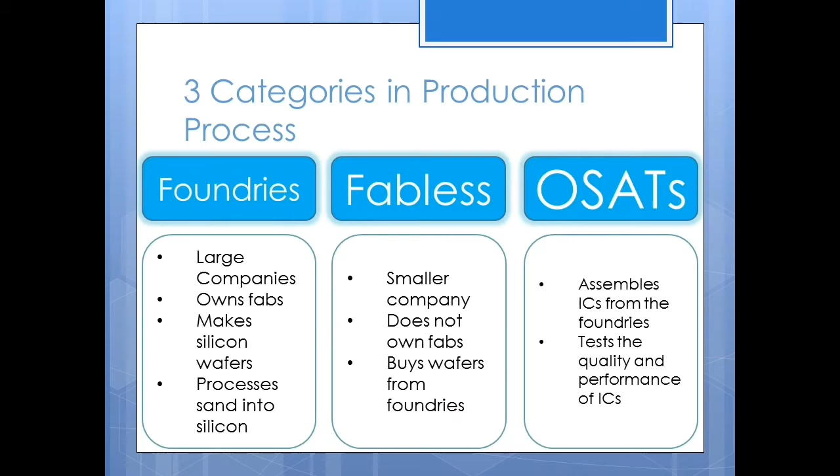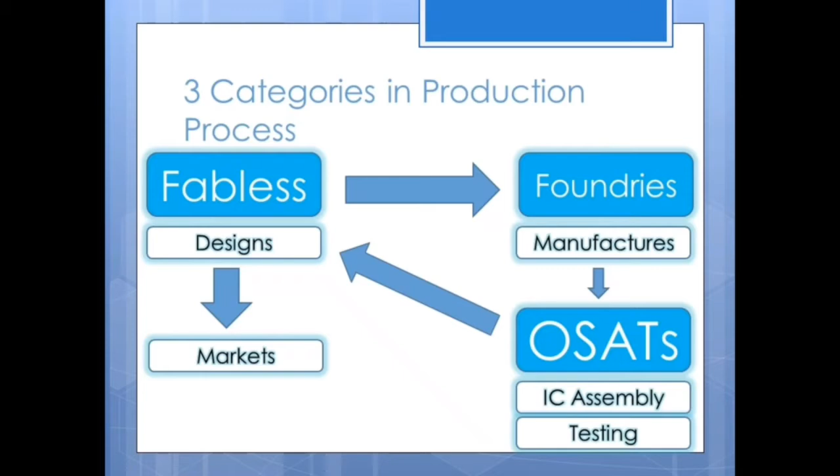There are three categories of players in the production process: the foundries, the fabless, and the OSATs, which stand for outsourced assembly and test companies. These three companies work with each other to produce the ICs that we use. The fabless designs the circuits which the foundries manufacture, to be assembled and tested by the OSATs, then marketed by the fabless. There are also companies called IDMs, which solely manufacture, design, and package their own ICs.

In terms of packaging, single die packaging has only a single die with a single function in each package. The SoC is like a complete system on its own. The MCM is composed of multiple interconnected chips with multiple functions. SIPs are like MCMs that are stacked, therefore smaller in size. SOPs are like SoC and SIP, but their passive components are embedded in the substrate, which makes them more compact.

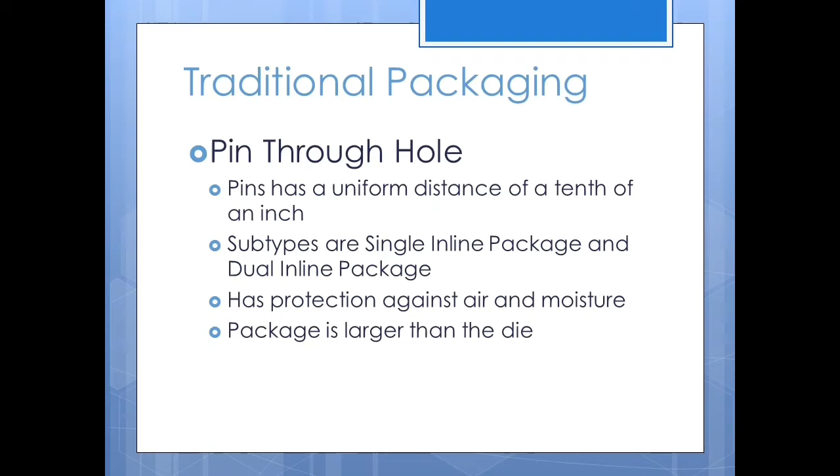Packaging technology can be classified into three types. Traditional packaging has two methods: the pin-through hole, where pins are inserted through the hole and then soldered. An example of this is the Atmega 328P in the original Arduino Uno board.

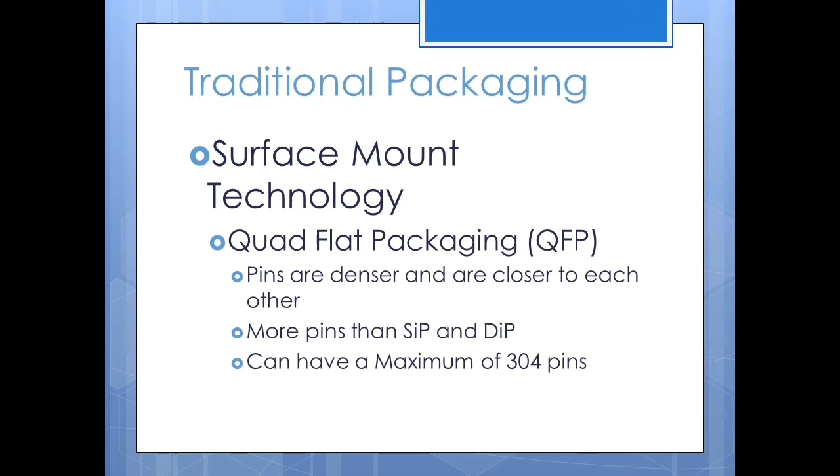Another method is surface mount technology, where the components are soldered only at the top of the board. An example of this is the Mega 328P, which can be seen in my generic Uno board that uses QFP.

Another subtype is the PGA, where the pins are found on the surface of the chips. PGA can be seen in AMD's Ryzen CPUs. Since the pins are found on the surface of the chip, it is more fragile.

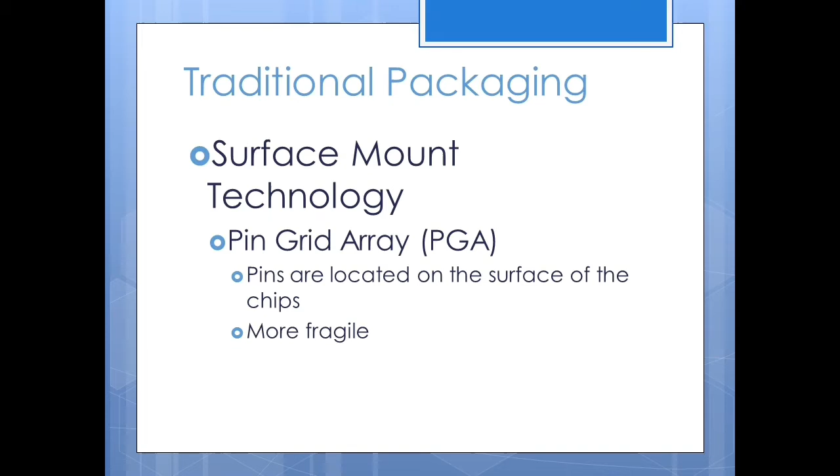Another type is the ball grid array, which uses solder balls rather than pins for easier soldering. In this type, the chip would be attached permanently. There is also a micro FCBGA, where the die is facing downwards.

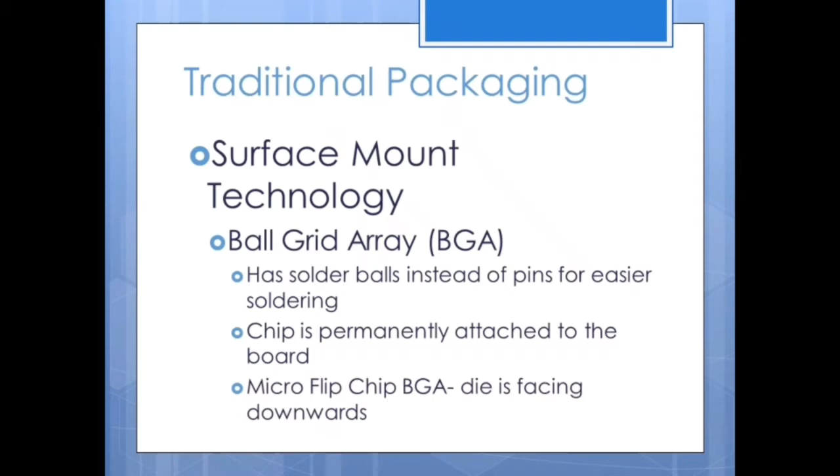Before going to the 2.5D and 3D technology, let's first talk about the silicon interposer. The interposer is a way of interconnecting IC components without the use of wires. They make use of TSV technology, which we will discuss later. It has higher density interconnection and excellent thermal and electrical performance. It is used for low power applications.

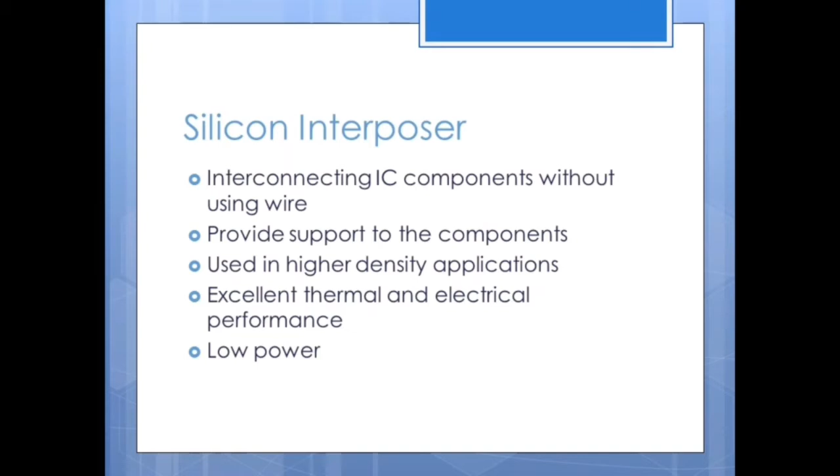There are two types of interposers: the passive interposer, where the substrate only contains passive components, and the active interposer, which has active components in the substrate.

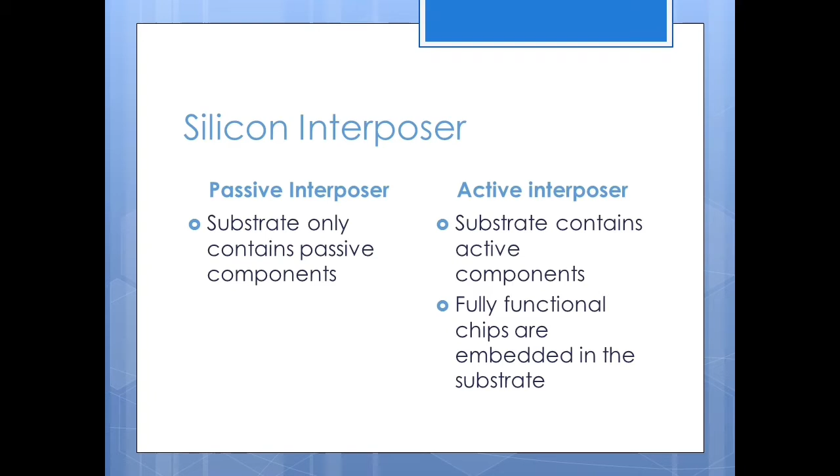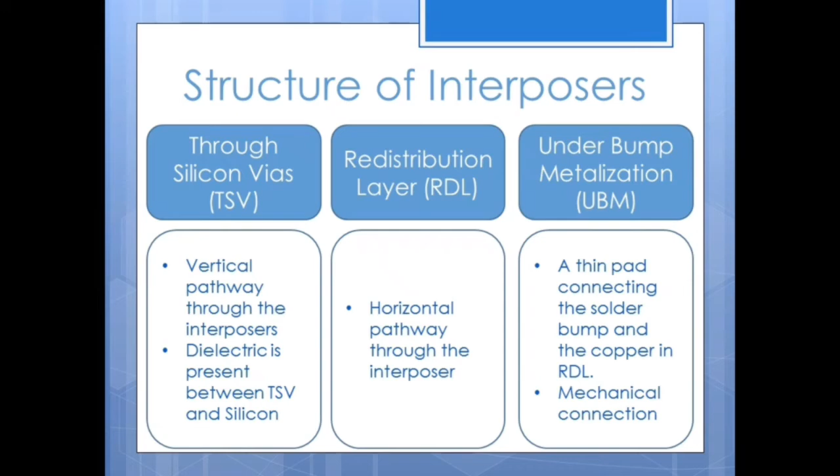TSV offer vertical pathways through the silicon interposer. There is a dielectric present between the TSV and silicon. RDL serves as horizontal pathways and UBM serves as mechanical connection.

2.5D and 3D packaging have a lot of common characteristics. They both make use of TSV technology. They have low power consumption and are much smaller than traditional packaging. They also have faster performance, which makes them more expensive.

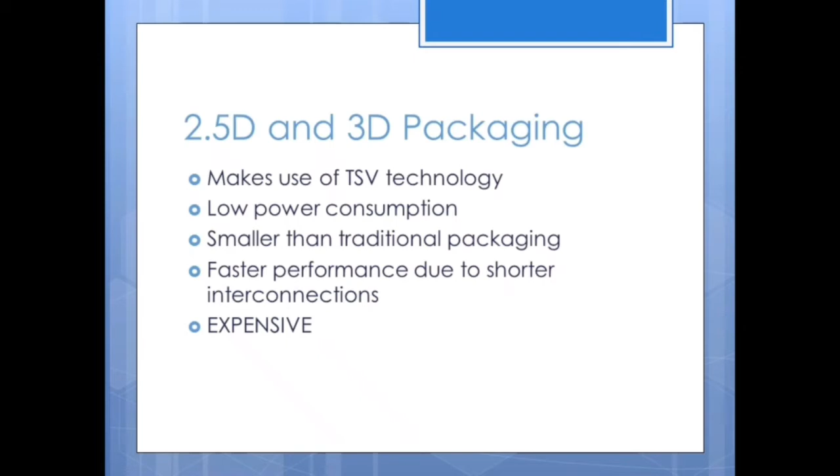The main differences are the kind of interposers used, heat management, and orientation of integration.

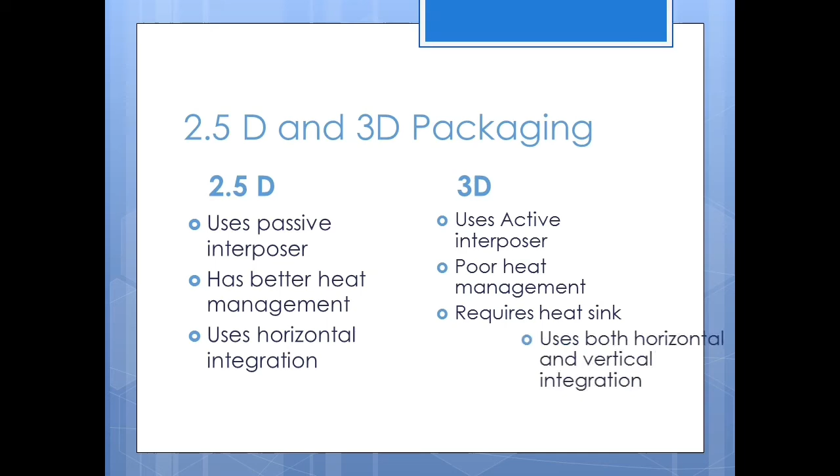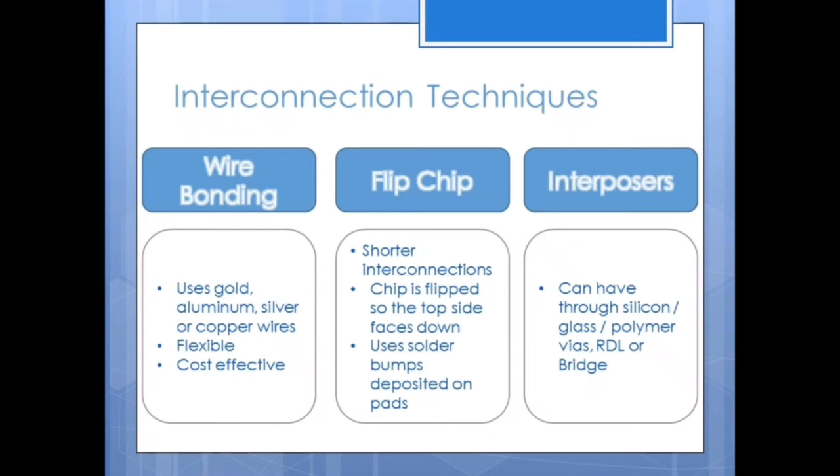There are three interconnection techniques: wire bond, flip chip, and interposer. In flip chip, the chip is flipped, so the top side faces down. Interposers can have a TSV, TPV, TGV, RDL, or bridge. Under wire bond, there are three types: ball bonding, wedge bonding, and stud or bump bonding.

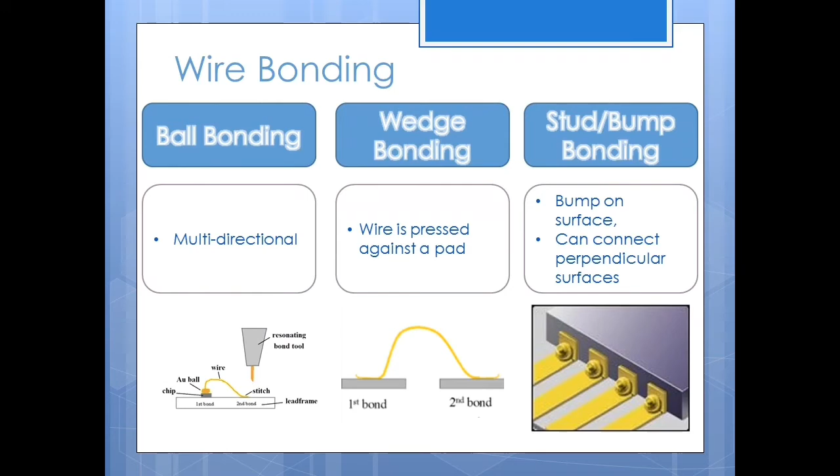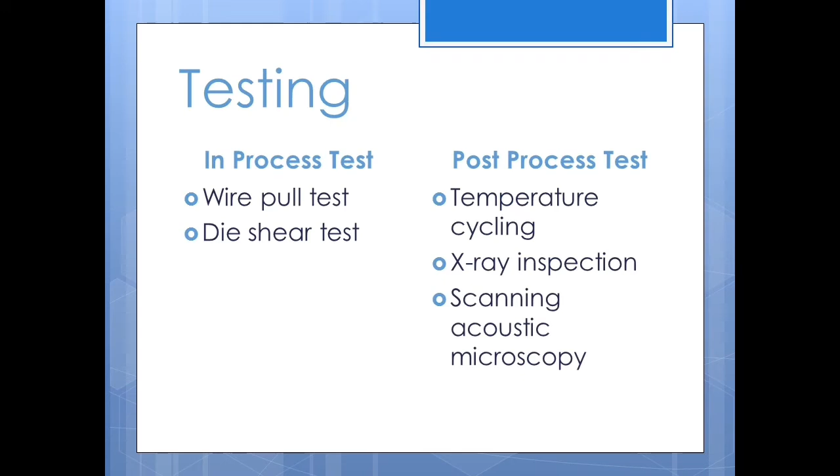During the packaging process, there are two tests done: the in-process test and the post-process test, to ensure the quality of the chips and their components.

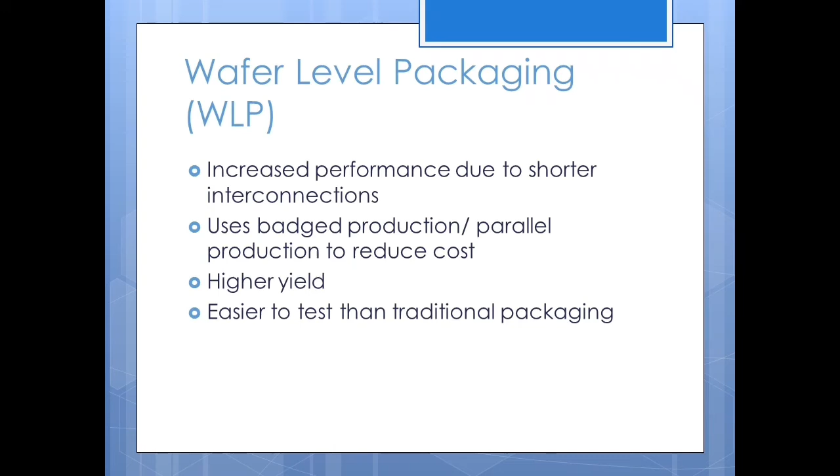WLP has a reduced package size and better performance than the traditional ones. They are cheaper since they are produced in batches and have higher yield. They are much cheaper and more reliable than gold wire bonds. Photolithography is used to print the circuit to the dies in the wafer.

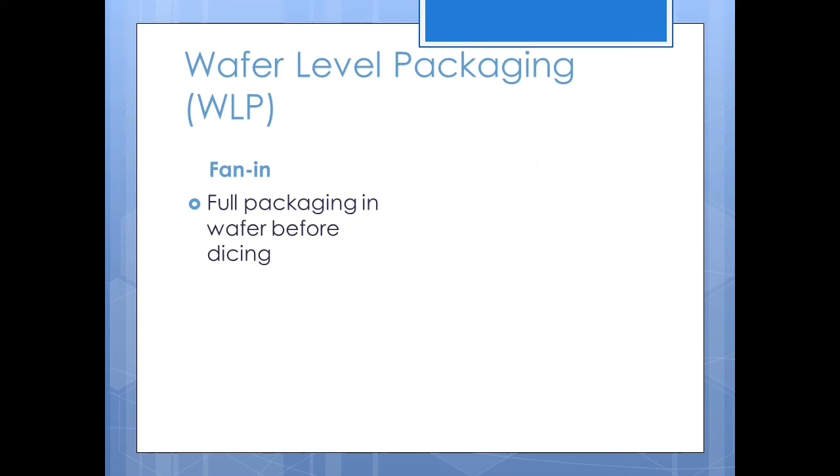WLP can be done in two ways: fan-in, where the packaging is done before dicing, and fan-out, where the dicing comes first and the good dies are selected, repositioned, and then packaged.

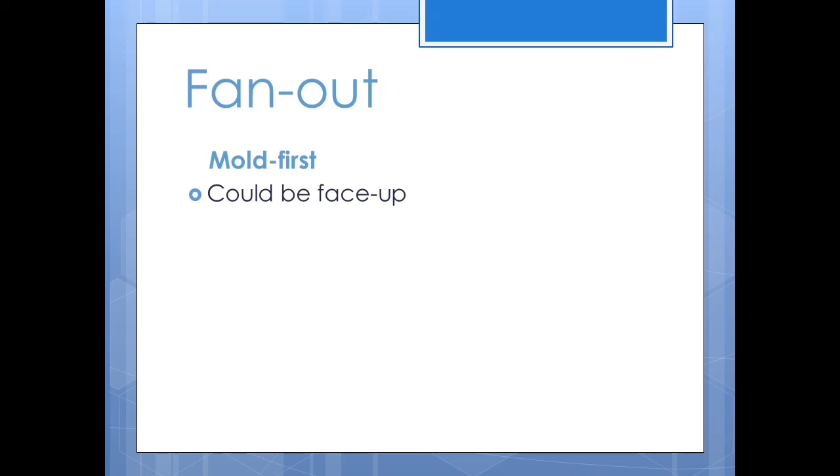Fan-out WLP could be mold first or RDL first. Mold first could be face up or face down, where the mold is applied before the RDL. In RDL first, RDL is applied first before covering it with the mold.

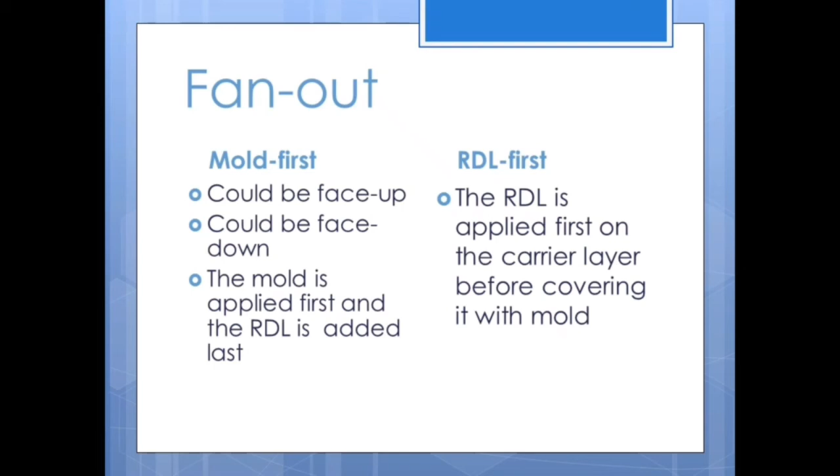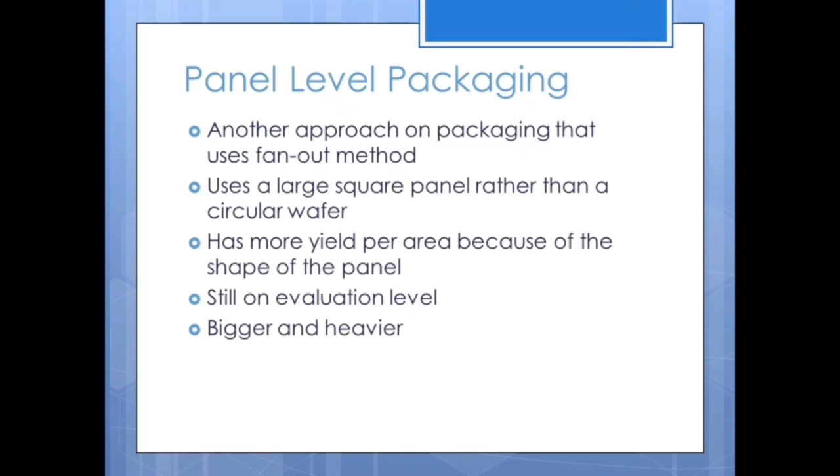PLP is another approach to packaging that uses fan-out, and instead of a circular wafer, a large square panel is used, which gives more yield per surface area. But since it is still at the evaluation level, it still lacks standardization since it is bigger and heavier. They are also prone to warpage of the mold, and the dies could shift.

Both wafer level packaging and panel level packaging have a higher yield and a cheaper price, but they still have issues that are yet to be solved in the near future.